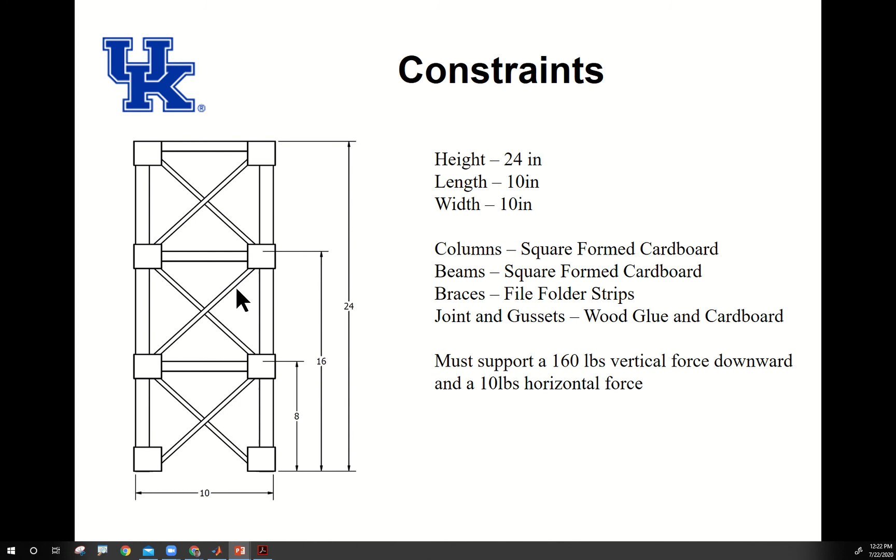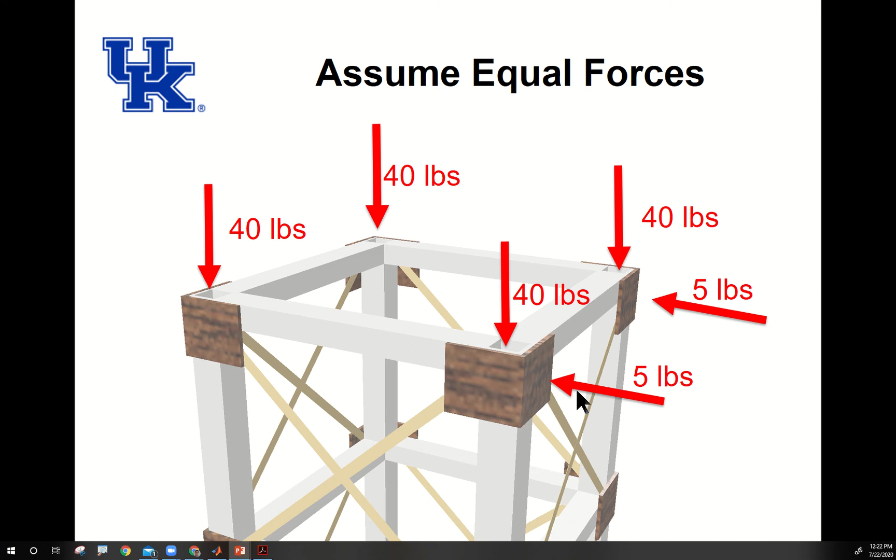So conceptually, my belief is if you're thinking I'm putting 160 pounds on top of a square entity, that it's just like as if I'm putting 40 pounds on each of the 4 posts, which is accurate, right? Similarly, also with my 10-pound crosswind, I can split that up into 2 5s to be able to move forward.

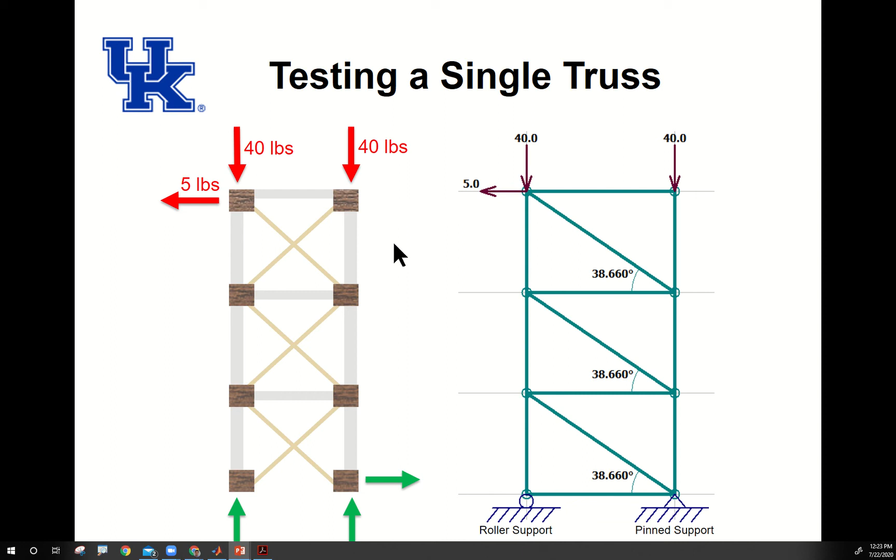We're going to make some assumptions here. We're going to assume that our tension forces are going away from our joints. We're going to assume our compression forces are coming towards it. We're going to have different types of support, one being a roller for one direction, a pin support for 2 directions. And we're going to say that positive is up and to the right and negative is down and to the left. We're going to have things that are going on a diagonal be broken into component forces.

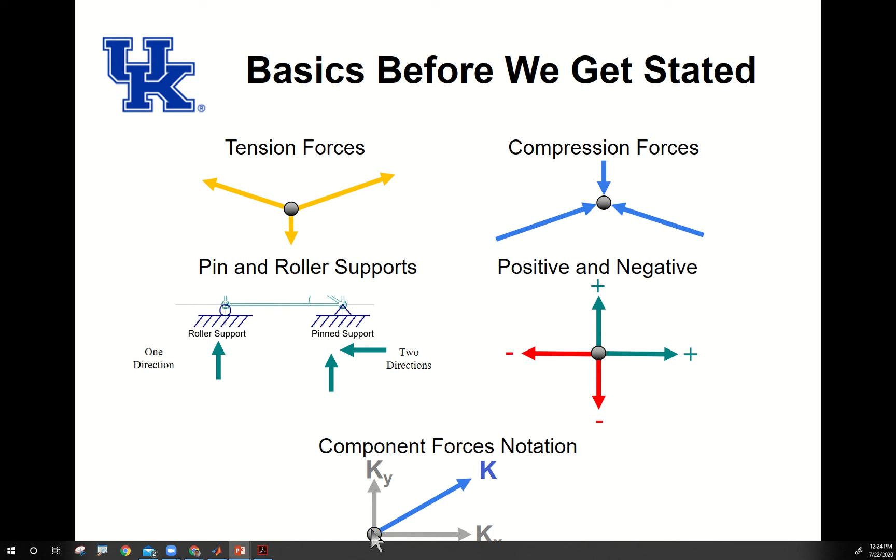So if I have this diagonal force, which we'll call K, I'm going to be able to say there's a Y component of it and an X component of it. So if I was to make a free body diagram, we imagine that we have a washer out there in the air. We have negative 4 pounds going this way and negative 3 pounds going this way, and 5 going off at this angle, right? We're going to have to determine whether this is moving or not, or we can make that calculation.

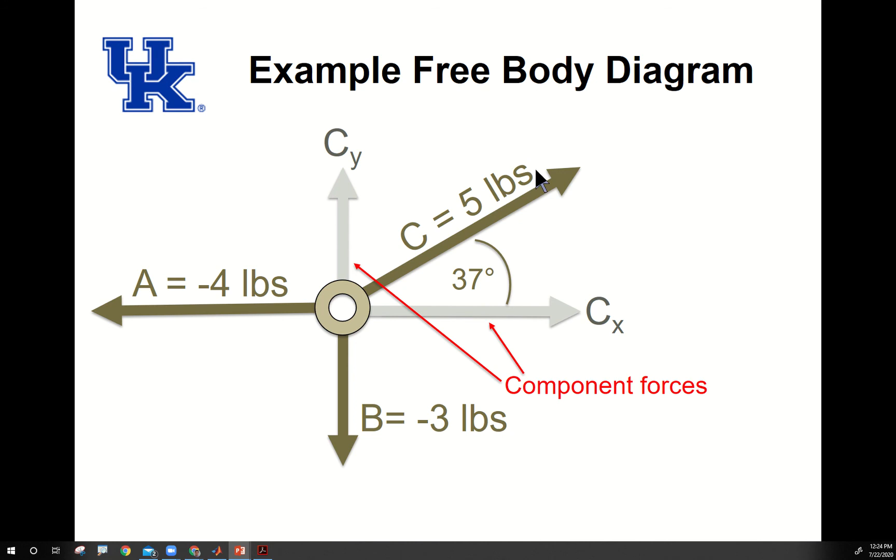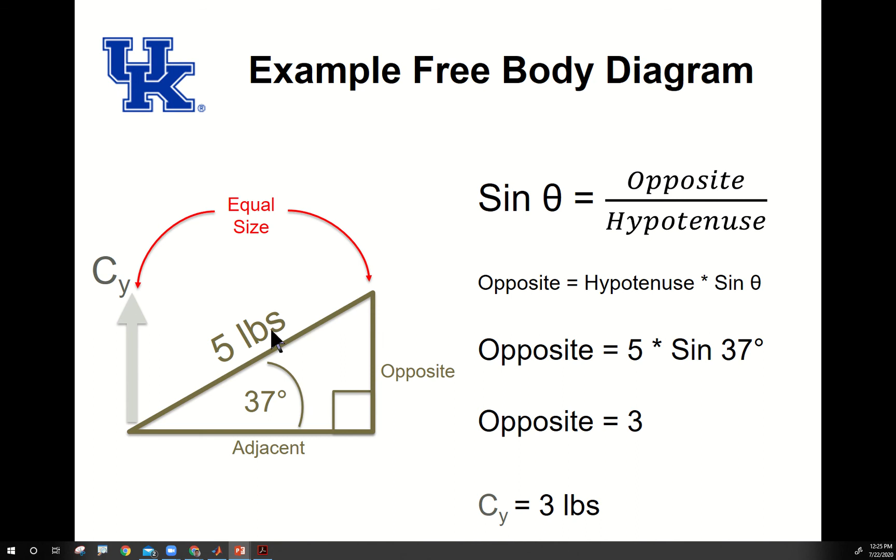And so what we can do is with our diagonal member, we can break that up into 2 component forces. So we have CY and CX, right? We can then use our 37 degree and use this as a triangle and solve for it. So we'll utilize the calculation to determine that my opposite side or my adjacent side is 4. It could be either way, and that my other side is going to be 3. And then we can see that that's actually going to cancel out. It's similar to a 3, 4, 5 triangle that you would see in math, right? But that's the basic mindset that we're going with this activity.

So to solve this, we're going to start with a joint that you need the least amount of information for, and that's the one that has the most numbers on it typically. So we're going to probably start here or here. The compression and the tension is going to be consistent in the member. So if we're pushing up here on this member with that 40, we're also going to be pushing down here with 40 onto that member. You'll see that further in a second.

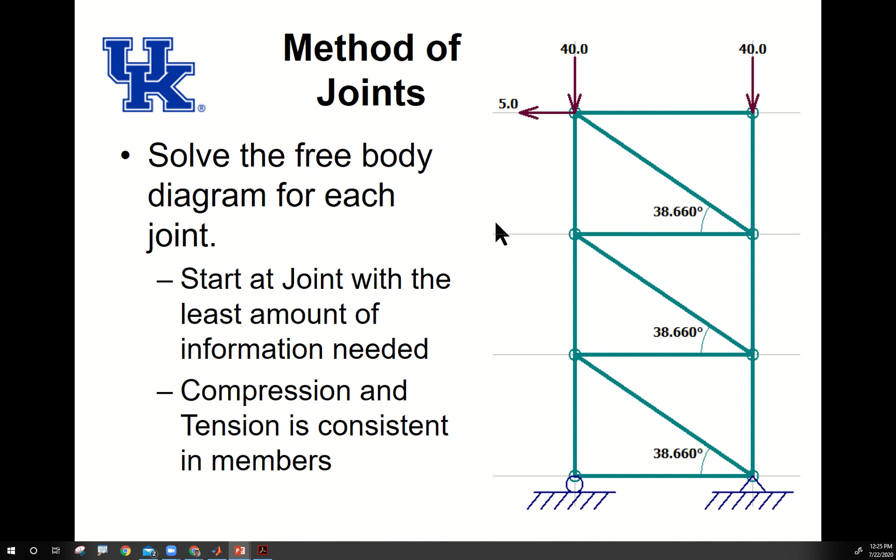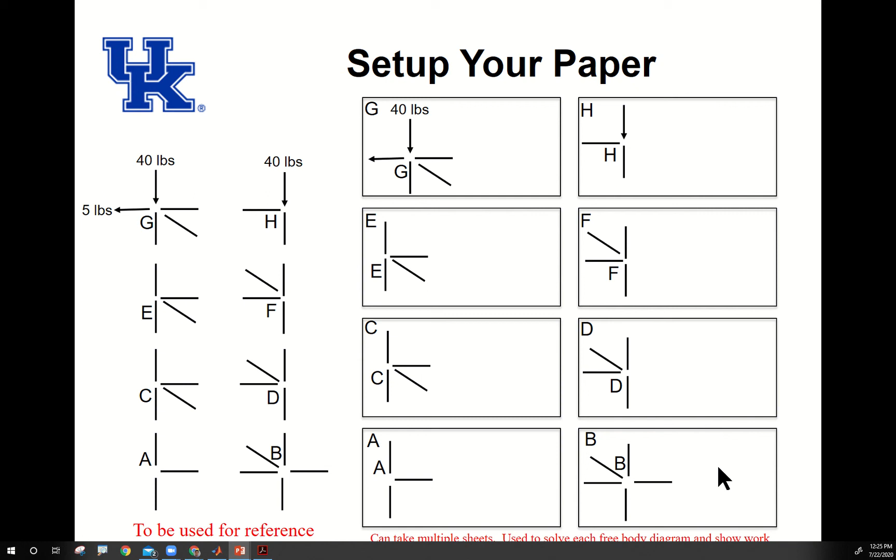I think it's useful to develop a document that looks like this. I have a small reference sketch of where everything is going, and then I have pages set up so that I can address each of the different joints individually. And so now, if I look at it, a moment ago I said we're going to use the one with the largest numbers for our start.

But if we look at this joint H, while it only has 1 number, there's more information actually applied. So I have 40 pounds going downward, and all my Y forces need to sum to 0 when I add them together, and all my X forces also need to sum to 0.

So if I have 40 pounds going down, what could cancel it out? Well, 40 pounds going up. And if I have those 2 together, that makes sense for that math. I also know there's no horizontal force, so my member GH must be 0.

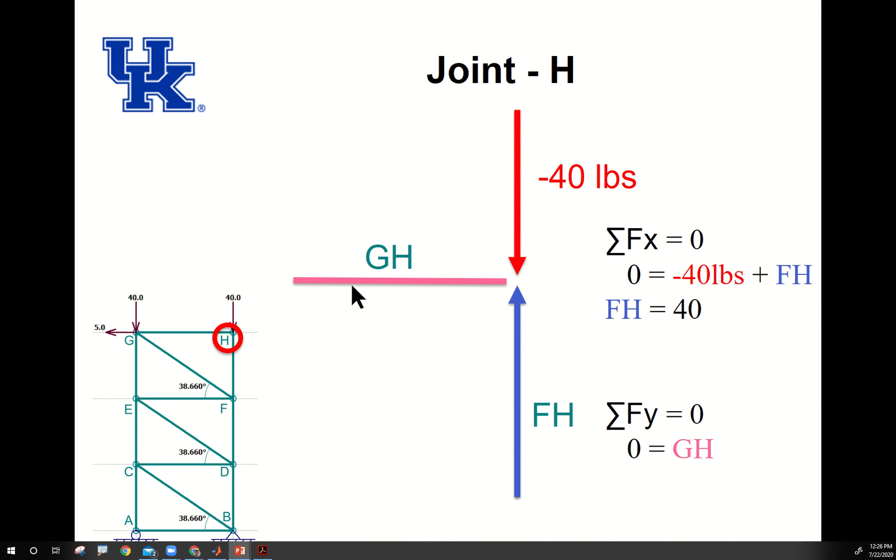Now, when we go into our next one, we carry that GH in. So we found that GH for that member is 0. But we're sort of making an error here, because typically when you have forces in a free body diagram, we want them to actually have an arrowhead on them. But I've left them off so that I can bring them in as we go.

So now I've got a horizontal force of GH, and then I have the X component of FG here. I get FG because it's between F and G, that's the member. And that's going to be pulling, because my 5 pounds can only be canceled out by the 5 pounds on this FG.

But if this one's pulling this way, it's also going to be pulling down, working against EG, which is going to be working up. So I'm going to break that up and solve for those two members. If it's got to have 5 pounds of force to cancel out that 5 pounds of force, my hypotenuse, when I calculate it, is going to be 6.4, and my vertical component is going to be 4.

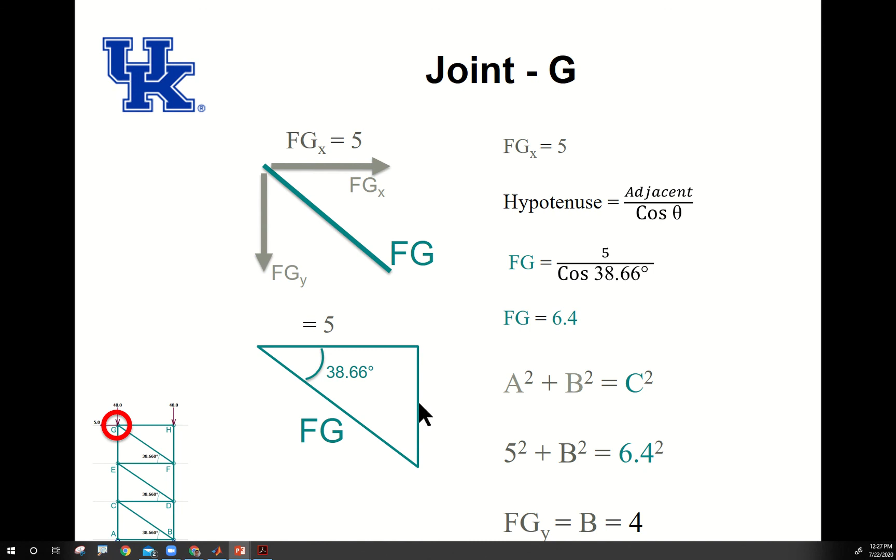I can then apply those, because again, this is just a triangle, into our equation. This yellow is represented by the gray, so I'm not doing calculations with it anymore after it's solved. My horizontals, when I sum them, are -5 and 5, which equals 0. And my verticals are -40, -4 and EG. If I add those together, EG has to come up with 44.

Similarly, with this calculation, we've got component forces of 5 and 4, because it's within a square, so the angle remains the same and the diagonal force remains the same. So I can put those values in directly. I have a horizontal force here that's -5, and I only have one option to cancel it out, which is EF. So EF is going to have to be pushing back towards this direction.

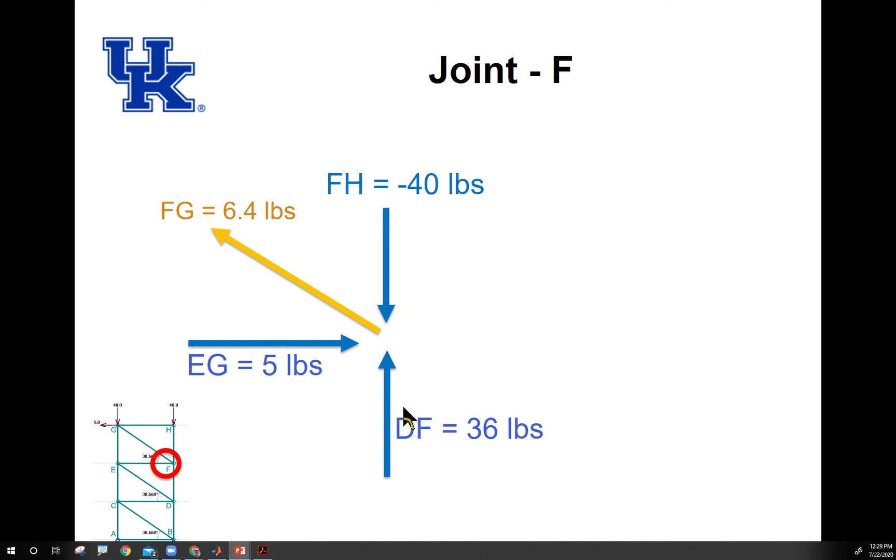I also see that my 40 going down is canceled out by this 4, so 40 minus 4 is going to equal my 36. And so it will end up looking like this, where we have 3 compression forces and 1 tension force going into that joint.

So if we were to solve the rest of this, we would want to solve for joints E, D, C, B, and A. And then we'll be able to check our math with our external forces. If I add my 2 vertical forces here, they will add up to whatever these 2 vertical forces from our supports, or reactionary forces, are.

They're not going to be 40 and 40, but they might be 60 and 20 or something like that. We will know that this right here will end up being 5. And so we're able to move forward with that as a check. So work through the problems, see what else you can solve, and make sure that you're able to get that check with the external forces.